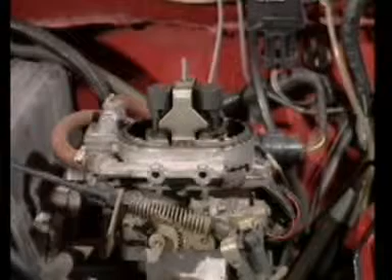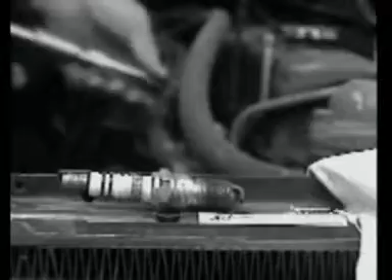A mixture that is too lean can make an engine run roughly and overheat. A rich air fuel mixture has less air in proportion to the amount of fuel. A slightly rich mixture can produce more power at low temperatures, but extra fuel steps up fuel consumption. A too rich mixture fouls the spark plug and causes incomplete burning, and that reduces power.

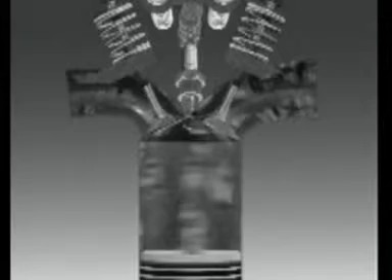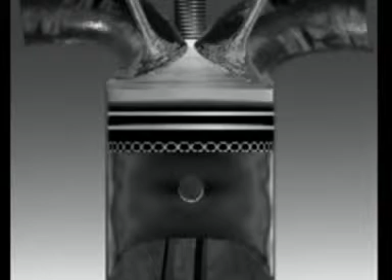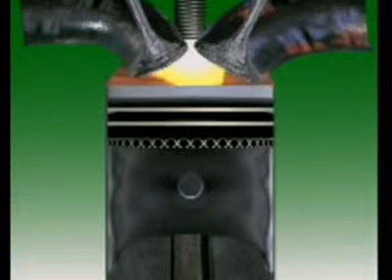In normal combustion, the spark plug ignites the mixture and a small flame forms around the tip of the plug. As the piston compresses the mixture, the flame spreads faster and moves evenly through the mixture. As the piston reaches top dead center, the flame picks up more speed to consume the rest of the mixture. Combustion ends with the piston a short way down the cylinder.

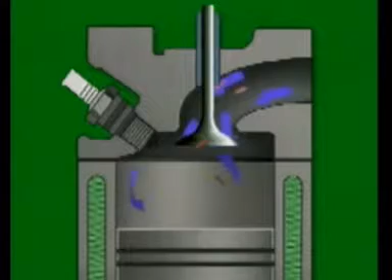Detonation is a damaging condition. Flames form in the cylinders caused by uncontrolled combustion. It occurs after the spark plug has fired. The sudden rise in pressure can cause a knocking sound. Sustained detonation can lift temperatures enough to cause pre-ignition, also called auto-ignition.

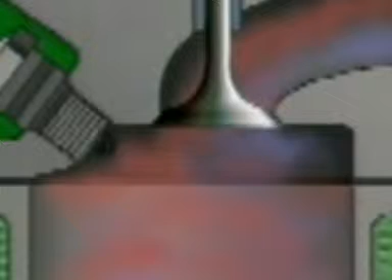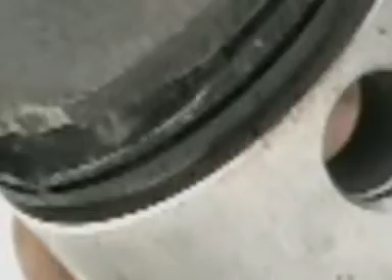Pre-ignition occurs before normal combustion when something in the combustion chamber heats up enough to ignite the mixture before the spark plug fires. A mixture may also ignite simply because it is unstable under the higher heat and pressure. Detonation and pre-ignition can cause severe damage and must be avoided. Engine management systems use knock sensors to detect detonation, and they retard ignition to prevent it.

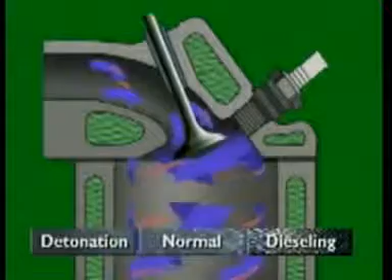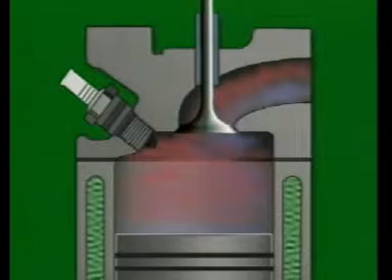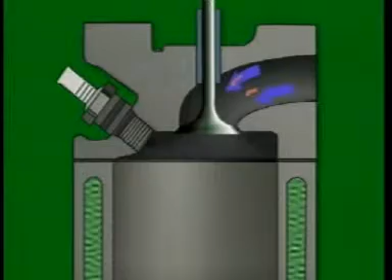This diagram best illustrates which form of combustion? In dieseling, the mixture is ignited without needing a spark plug, since ignition has been turned off. In detonation, there are two flame fronts, one initiated by the spark plug and one by another combustion source.

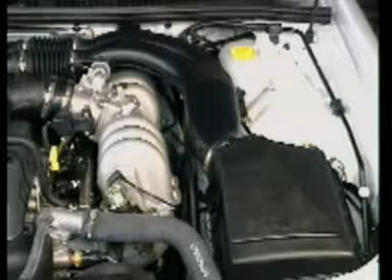This section examines the air supply system. In a multi-point injection system, the air required for the combustion of the fuel is led from the air filter through the throttle valve and into the common manifold or plenum chamber. From here, the individual intake runners or pipes branch off to each cylinder. All of these pipes are of equal length.

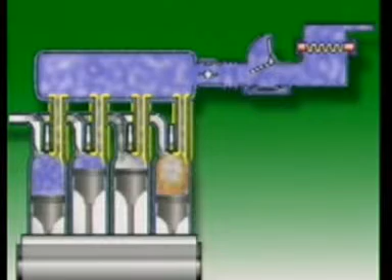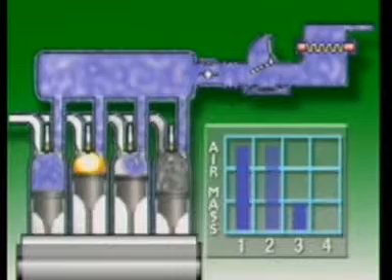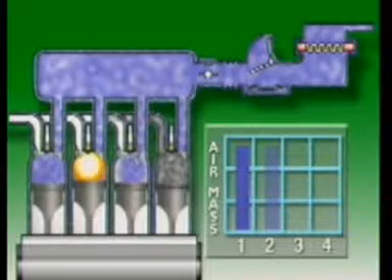The design of the intake system determines how large an air mass can be drawn into the cylinders at any given engine RPM. This is where most advantage comes from electronic fuel injection, since it can achieve exactly uniform distribution of the air delivered to the cylinders with unrestricted passage to each cylinder. The cylinders fill with air as efficiently as possible. The breathing of the engine, or its volumetric efficiency, is improved.

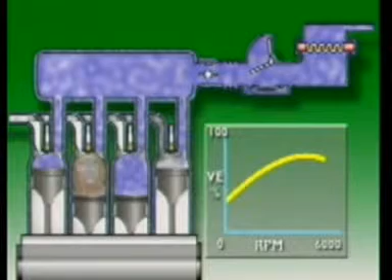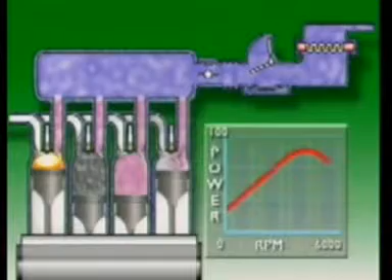The more air crammed into the cylinders, the denser the air fuel mixture when ignition occurs. This increases thrust on the piston and increases the engine power output too. The temperature of the air influences how dense the air fuel mixture will be. Cold air is denser than hot air, so has a greater mass in any given volume.

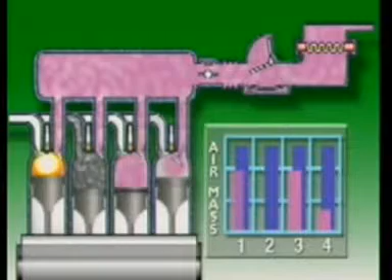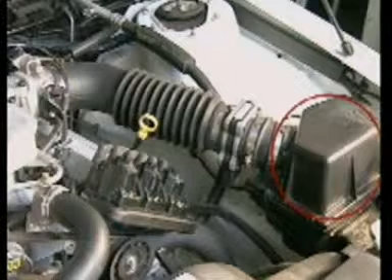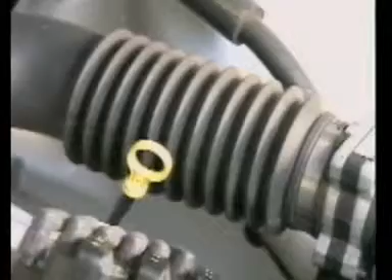This is why in most intake systems the air entry to the intake is away from the engine heat, to ensure the entry of cool air. Since the manifold carries air only, it doesn't need to be heated by the coolant. Filtered air arrives at the intake ports as cold and dense as possible, ready for mixing with the fuel from the injectors. The amount of air entering the engine must be measured, so the amount of fuel injected forms a mixture to suit the engine operating condition at that time.

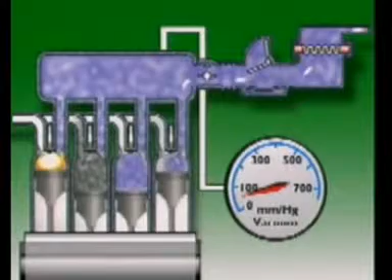The volume of air entering the engine varies according to the position of the accelerator pedal and the engine speed. Changes in volume are reflected in changes in the manifold pressure between the throttle plates and the intake ports. When the piston draws air away from the manifold more quickly than air can pass the throttle into it, the pressure in the manifold falls. At idle speed, this pressure is low, a high depression or vacuum. As the throttle plate opens, the pressure approaches atmospheric.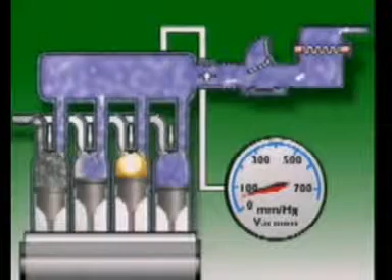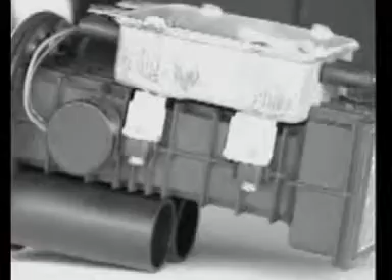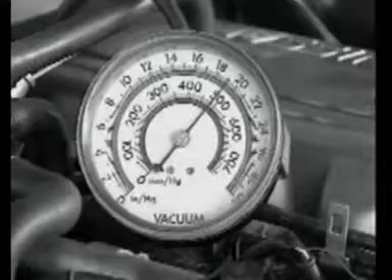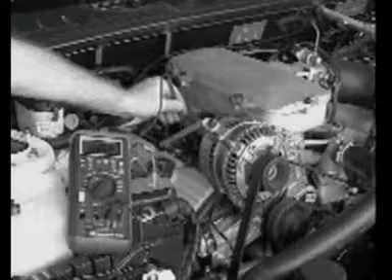Devices measuring the air entering the engine send electrical signals to the ECU. The signals can be a measure of the volume of the air or of the manifold pressure. In both cases, this information is combined with the engine speed signal to provide the basic setting for the injectors. An air flow meter measures the volume of filtered air entering the engine. It can be mounted on